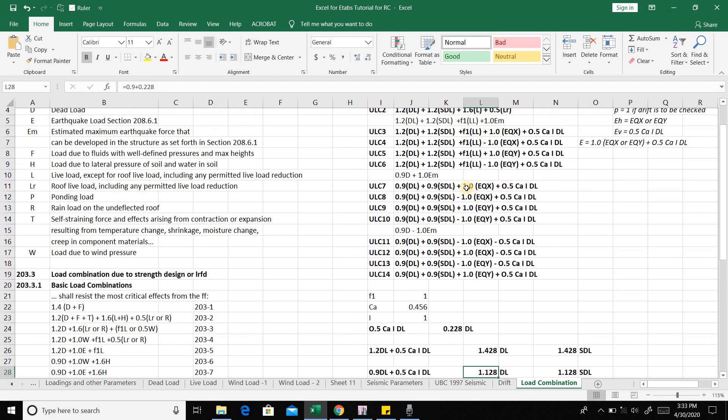Okay, next, let's go to our ULC7. Ang ating scale factor na ng dead load and SDL mapapalitan. Ito na yun, 1.128. And then, wala na tayong live load dyan. Yung ating EQX na lang, positive and negative also. So, let's go to our ETABS. Add new combo. ULC7. And then, ang scale factor ng ating dead ay 1.128. Add. Same for SDL, 1.128. Next, wala tayong live load. Okay, so earthquake kaagad. So 1.0 na EQX. So that's it. Let's click OK.

Add new combo. ULC8. Oops. ULC8, and then dead load is 1.128. Add. SDL is the same, 1.128. And then our ULC8 natin is EQX pa rin pero negative. So EQX minus 1.0. So okay na yan. ULC9 ang next. Okay, so Y naman. Double check lang natin. So ULC9. Our dead load is still 1.128, add. No, not live load, SDL, 1.128, and then our EQY. Let's double check. EQY positive. Okay na yan.

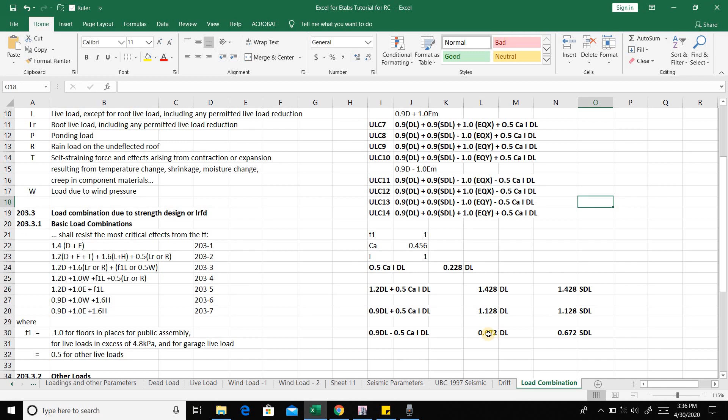Next, ULC10. Dead load still the same, 1.128. SDL 1.128. Earthquake natin, ULC10, EQY negative. So negative 1.0. Okay. So next, dito na tayo sa ULC11 to 14. Ang magiging factor natin for dead load is 0.672. So add new combo ULC11. Dead load is 0.672. Add SDL ganun din, 0.672. Add natin, then earthquake natin is negative EQX. Okay, negative 1.0.

Okay, and then add new combo ULC12. 0.672 pa rin. SDL the same, 0.672. For 12 is positive naman yung EQX. Okay, so let's click add. And then 13. ULC13. Dead load is 0.672. Add SDL 0.672. Add, and then we will have our EQY at negative 1.0. So click OK. Then our last combo ULC14.

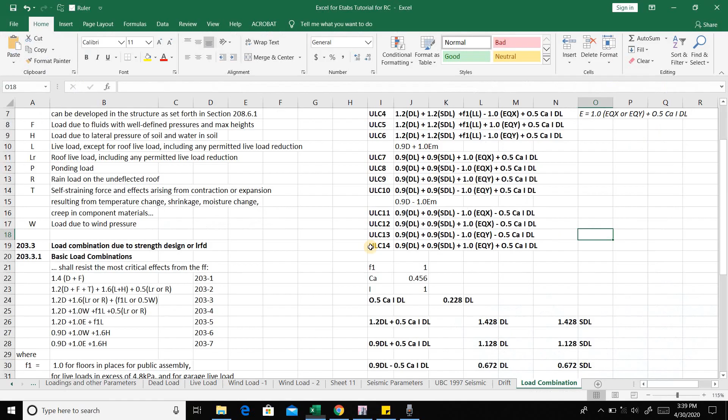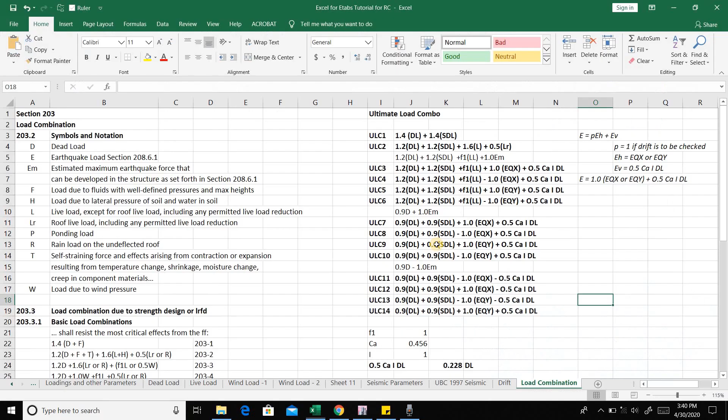ULC8 negative EQX. Okay. Then positive. ULC6 live is 1, EQY negative, correct. ULC5 positive. ULC4 EQX negative, correct. So positive dito. Then we have our ULC2, and then ULC1. So okay na yan. So that is our load combinations. So click OK. So meron na tayong load combo.

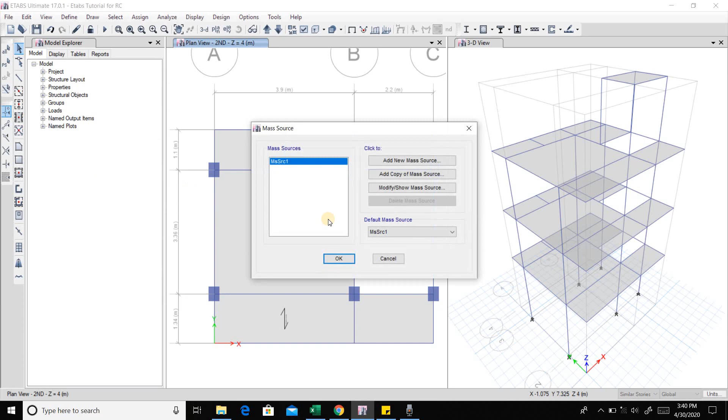And then next, kailangan natin ngayon mag-define ng ating mass source. So earthquake force is inertial force. So that is a force that depends on the mass of the building. Kaya ngayon, kailangan natin mag-define ng ating mass source. So punta tayo sa define, then click mass source. Modify or show mass source. Click natin specified load patterns. Let's go to our dead. Add natin, 1 ang multiplier niya. SDL natin, multiplier din nun 1.

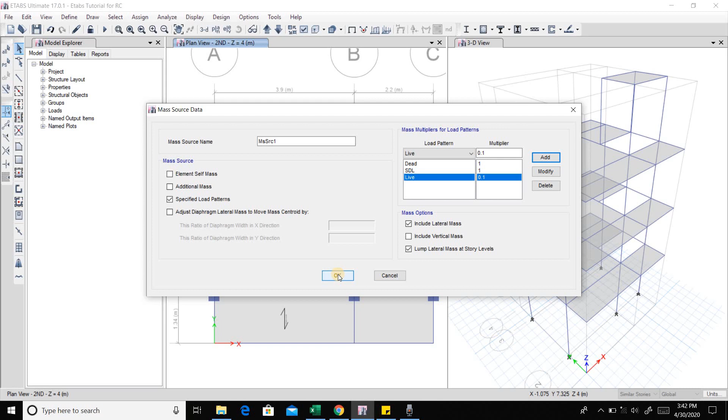And then for our live load, multiplier natin dyan ay 0.1 para sa standard occupancy. So click add. Okay na yan. And then okay na yung lahat. Click OK. So that's it. So ready na tayo para sa ating next na video. Pupunta na tayo sa mga huling steps before tayo mag-analyze and then mag-design.